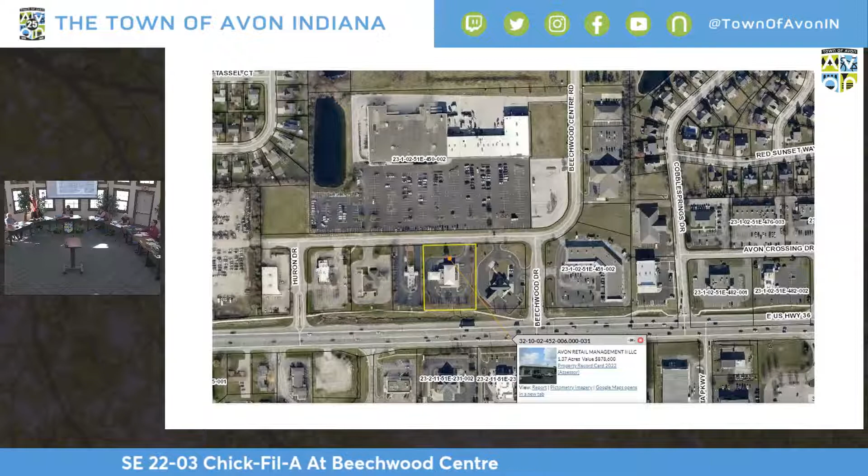And here's a location exhibit. You can see the site is highlighted in yellow.

Some history on the site: the subject property was part of the original incorporation of the town. The property is zoned C2 and it falls within Tier 1 of the US Highway 36 Overlay District. The lot was platted under MIP 03-04, Beechwood Center Lot 4C, alongside a development plan DPR 03-15, National City Bank. Since then, PNC Bank occupied the site. However, the lot is currently vacant.

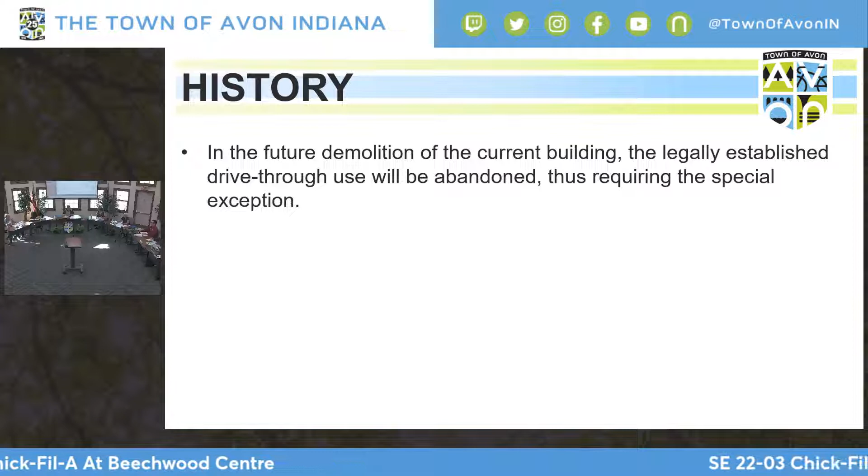In the future demolition of this building, the legally established drive-through use will be abandoned, thus requiring the special exception.

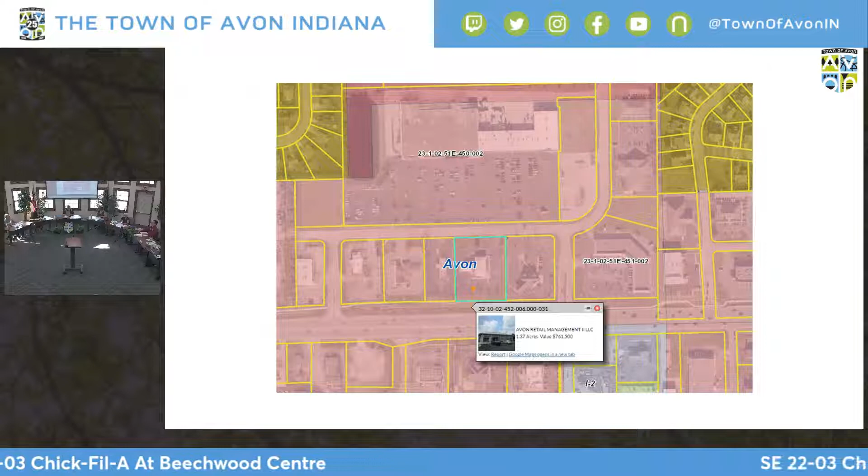Some comments per subsection 210E: drive-throughs are listed as a use that requires a special exception under Tier 1 of the U.S. Highway 36 Overlay District. The petitioner is proposing to construct a Chick-fil-A restaurant with a drive-through use, as is integral to Chick-fil-A's business model. Staff finds this proposal to be consistent with and conducive to the surrounding land uses, as the site currently has a drive-through, as do many of the neighboring Beechwood Center outlots. Staff finds that this proposal meets all criteria for a special exception.

With that, we recommend approval of this petition, subject to the following condition: approval is subject to the review and approval of a development plan review petition in accordance with Article 810 of the Town of Avon Unified Development Ordinance. I'm open for questions.

Questions for staff? If there are none, we're ready to hear from petitioner.

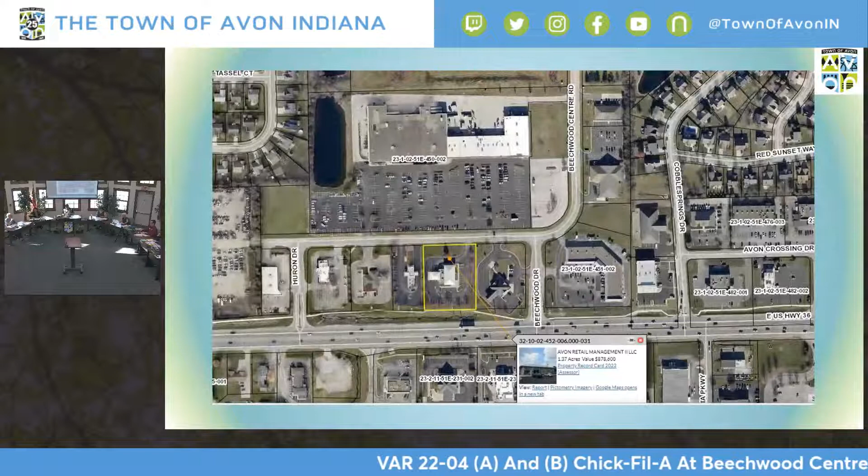Same location, same history. The applicable standards are subsection 210K. All components of a drive-through, including stacking space, menu boards, and pickup windows, must be located within the side or rear yards of a lot. Drive-through components cannot be located within the front yard, or in the case of a corner lot, cannot be located in the front yard that faces US Highway 36.

And subsection 612B3: each drive-through lane must have a bypass lane at least 12 feet wide. The bypass lane also serves as a drive aisle for parking. The minimum aisle width noted in table 6.1 must be provided. Bypass lanes do not need to be marked.

Staff believes that these standards were calculated for restaurants that have a much lower volume of drive-through users than is generally experienced at a Chick-fil-A restaurant at peak times. These variances would improve site navigability and stacking capacity, and allow for an efficient and convenient site layout by separating the site's drive-through and parking lot.

The strict application of the ordinance would constitute a practical difficulty in the design of this site. Having drive-through elements facing US Highway 36 is not atypical of the Beechwood Center area — both adjoining properties to the east and west have drive-through elements in their front yards facing US Highway 36. And the absence of a bypass lane will allow for increased stacking capacity, which would likely reduce spillover onto Beechwood Centre Road. Staff does not believe these variances would adversely affect the neighboring area.

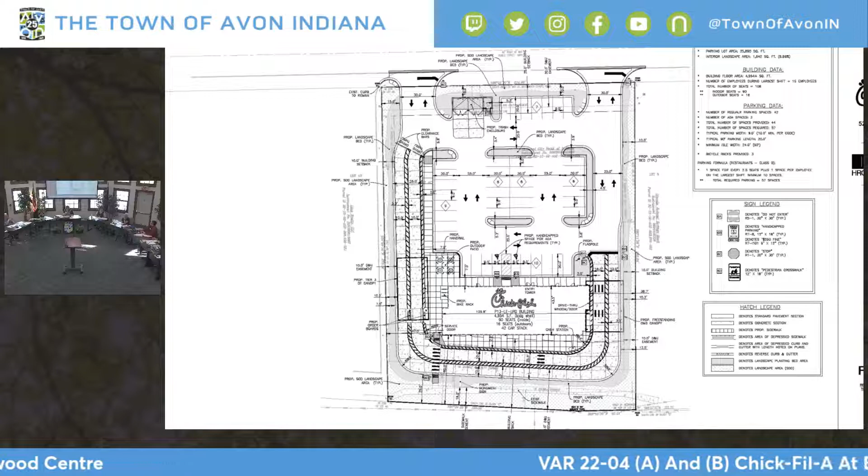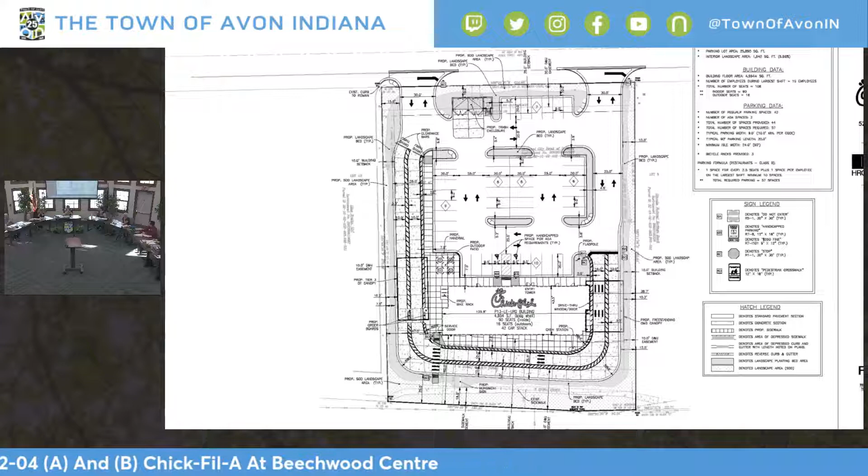But doesn't it also give people who are leaving the parking lot access to get around? I'm thinking of the McDonald's in front of Kroger, with 2 drive-through lanes. If you're parked right at the entrance to the drive-through lanes, you need that bypass lane to get out of the parking lot. But that wouldn't be necessary with this design, except it doesn't give people the option of leaving the drive-through lane if the fryer's down or something.

Specifically, what I was getting at is whether the function is simply for convenience, or is there a safety function here? That's why I'm asking. Yeah, I think safety is definitely part of the function of the bypass lane. But staff would say we're more concerned about the stacking going onto Beechwood Centre Road than about having this bypass lane from a safety standpoint.

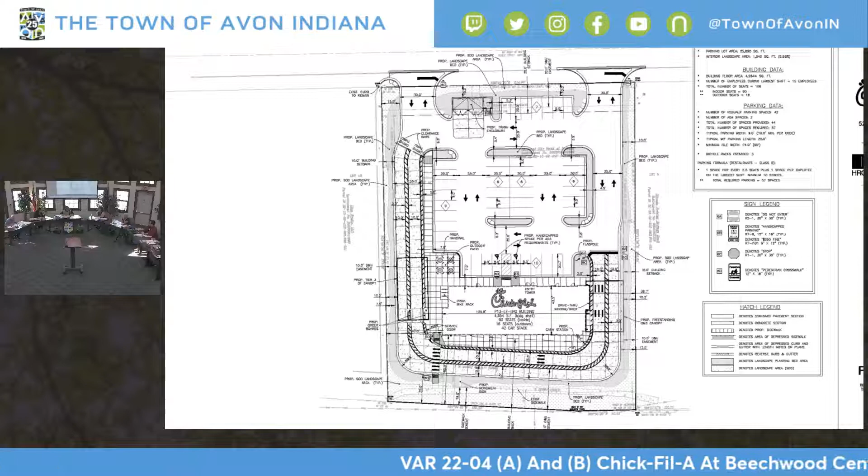And has this been through TAC? No, this has not been through TAC. We don't have any comments from public safety yet.

No, we do not. I do have a question though, because now that we're talking about not being able to exit the drive-through lane, I guess if there's an emergency, if there's a car stalled or something, do they just drive through the yard, get pulled out of the yard? How's that addressed? A bypass lane allows for that access.

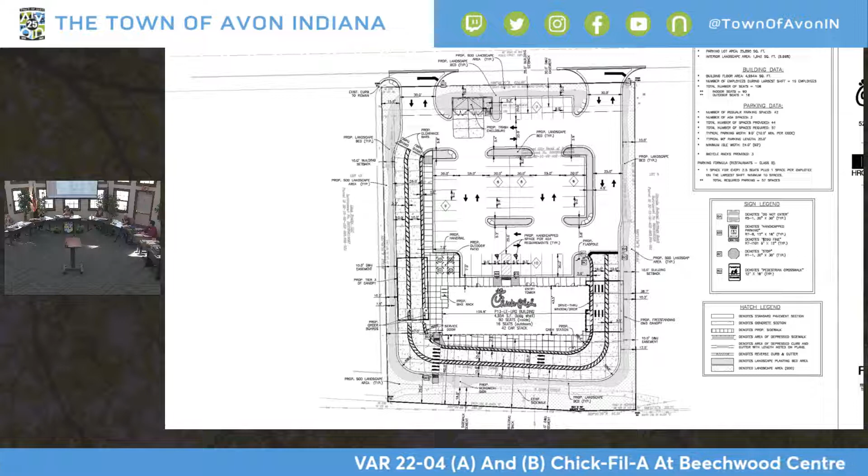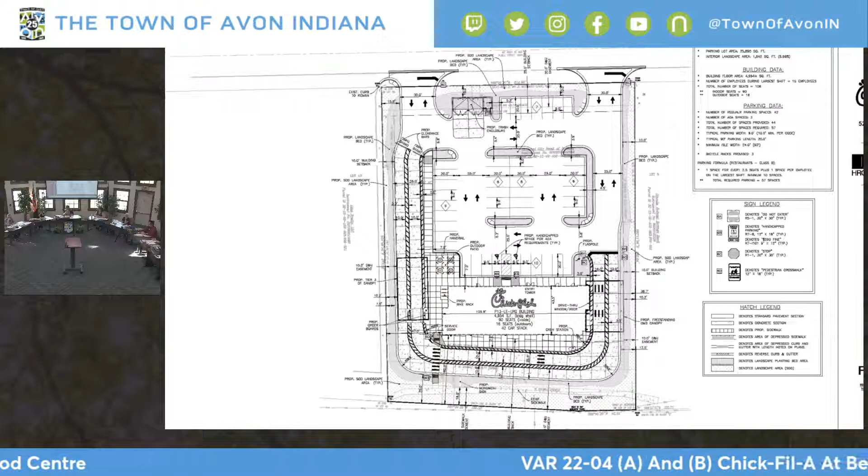We believe that with the condition of the signage, people will have adequate and ample opportunity to avoid the drive-through. We believe it's their choice to enter the drive-through.

Well, I'm talking about if you're already in the drive-through and your car breaks down, or a medical emergency happens. Because there's no bypass lane, there's no way to get that vehicle out. Are the two lanes separated by a divider, or are they just two lanes right next to each other? I believe they are separated, but that's probably a better question for the petitioner. I didn't review the site plan to those kinds of standards.

Any other questions for staff? If there's no more questions for staff, we'll hear from the petitioner.

Thank you. Well, let's pick up where the conversation with staff left off. If you'll all open your booklet to tab 2, we could even put it on the screen. I think the idea of this layout provides not only an efficiency enhancement, but also a safety enhancement.

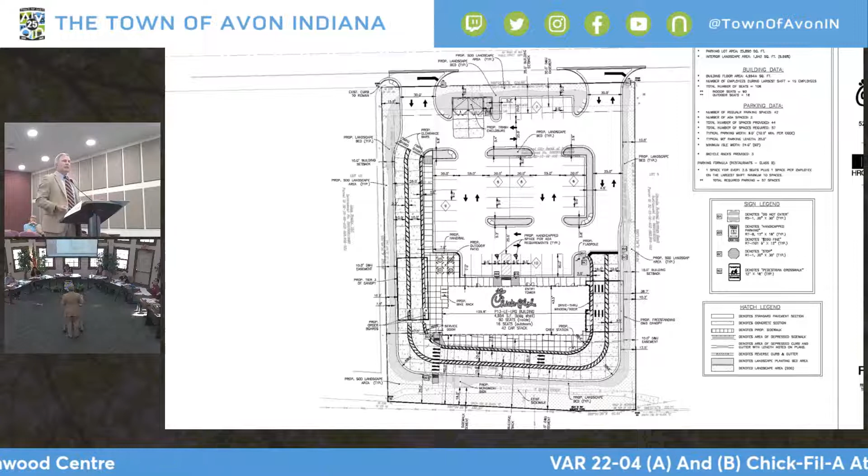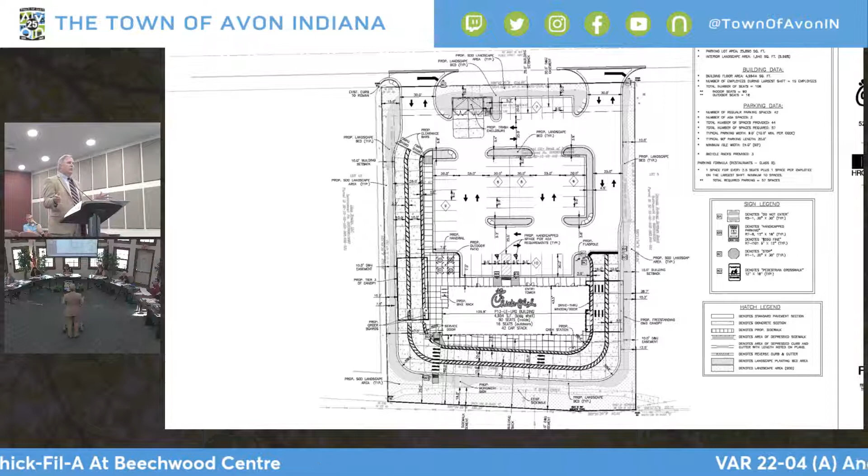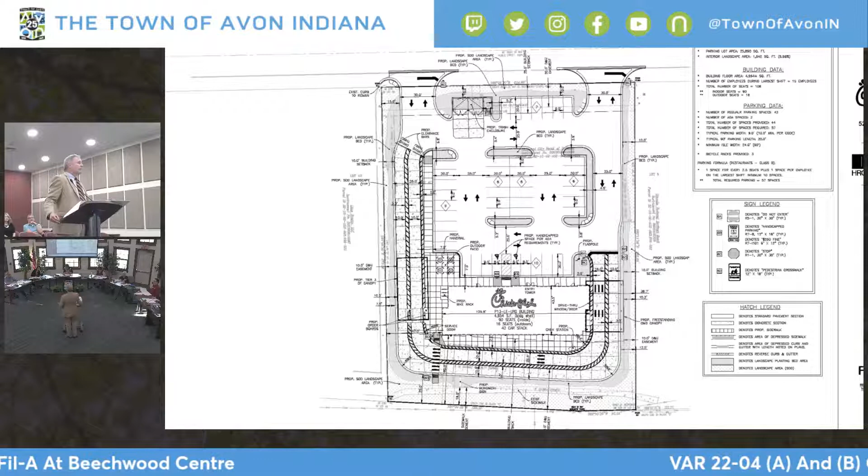Not so much for the off chance that a car breaks down while you're in it, but when you think about the normal drive-through situation, particularly under your UDO where you allow the bypass lane to be used as a drive aisle too—what this does is segregate and reduce conflicts between folks parking and walking into the building, out of the building, back to their cars, without crossing that drive-through traffic. So we think safety in 99.95% of cases will actually be enhanced through this.

By allowing that customer, when they come in, to view the landscape and either decide to queue in or park and walk in for that type of service, we think that makes much more sense than the traditional model of having parking on the outside of the drive-through lane, with the bypass lane serving as a drive aisle anyway.

We think that's going to reduce the amount of conflict for traffic coming in. As all of us have no doubt experienced, whether it's Chick-fil-A or Dairy Queen on a hot night, the worst thing in the world is to approach a business from a public street and want to turn in, and you've got stacking backed up to where nobody can get in and out. That's what this design is intended to mitigate, by having that additional stacking space in two lanes. People love Chick-fil-A that much, and there's a lot of family traffic with kids in the back who just want to get their stuff and go.

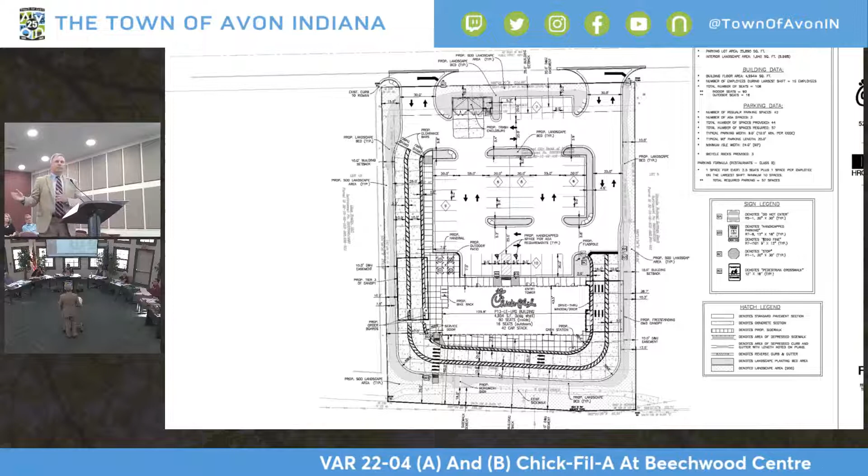That's a big part of the market. I know business reasons aren't always why we approve variances. We approve them because the code either doesn't contemplate something new—which is no fault of the code, that happens all the time—or your code, even though newly adopted, is essentially a carryover in these provisions on the 36 overlay from the previous version. So we submit that this layout is not only more efficient, but safer, not only for customers but for the team members and employees, by keeping that traffic separate. That's obviously a key finding.

When we look at variances of development standards, we look at the effect on the overall community, public health, safety, and welfare. We've got two concepts going on here: one, having stacking that fronts in a front yard. We've actually got two front yards, because Beechwood Centre Road is actually public. So we have two front yards, and we're kind of stuck either way.

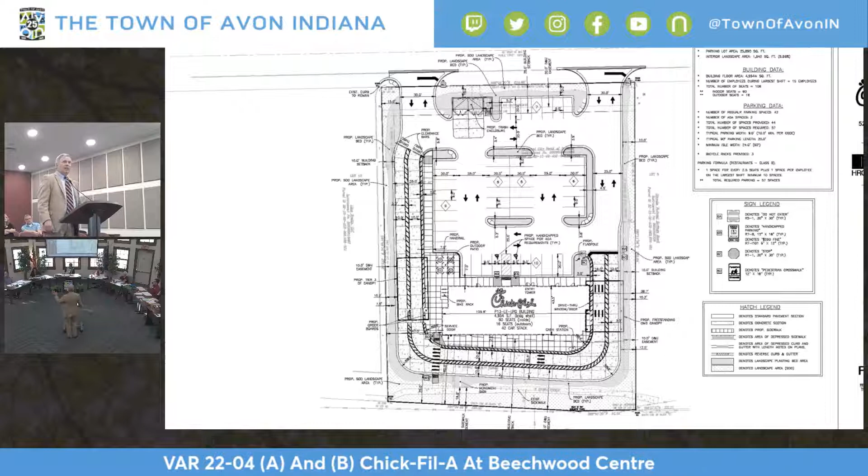Then we go on to whether or not this arrangement and the request for variances adversely affects our neighbors. We've got two true adjoiners, notwithstanding the parking lot for Rural King. We've got Dairy Queen to the west and the bank to the east, and they are similarly situated in terms of having drive-through and cars between 36 and their buildings. By reducing the opportunity for spillover, it helps those businesses—we don't want to block any drive aisles for our neighbors. For Rural King, it's all parking lot between then and there, so there shouldn't be any adverse impact to them as an adjoining property owner.

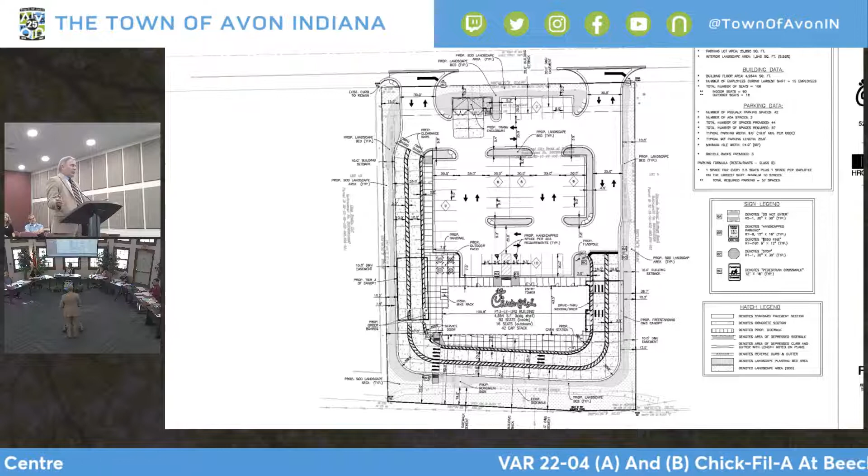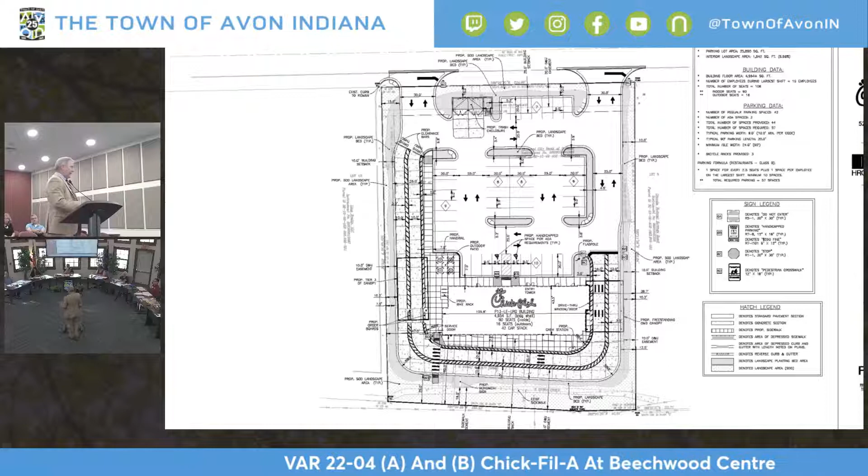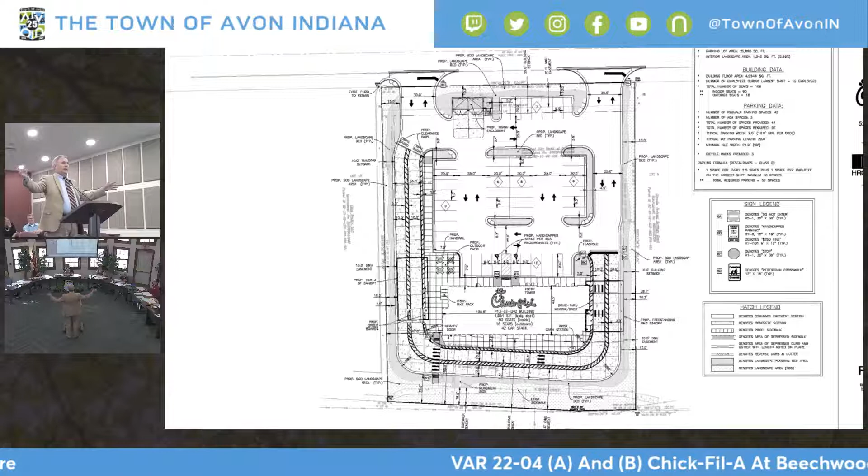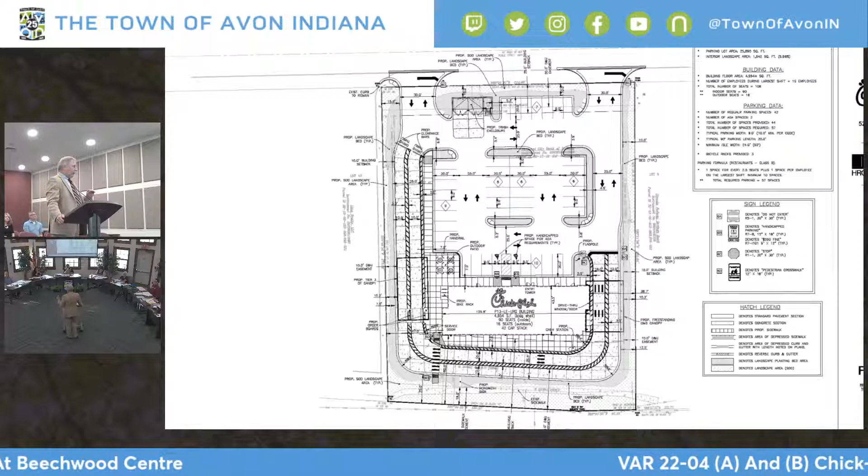We think that as we move into the other criteria—practical difficulties—one of those terms we all use in everyday language also has legal significance in zoning law. We believe that because this is a site that's already constrained, we're not just picking a site and developing it with whatever acreage we want—we have to work within the bounds. So we have to do something that works well within all the requirements of the 36 overlay. We think these variances are the minimum required to make the business economically viable, which is one of the allowed tests for practical difficulty.

We hope that makes some sense to you as a deciding body. We are not looking to do anything more than the best we can to serve customers in an efficient manner, to make that investment worthwhile, to keep the employees safe, and to keep the public safe as well.

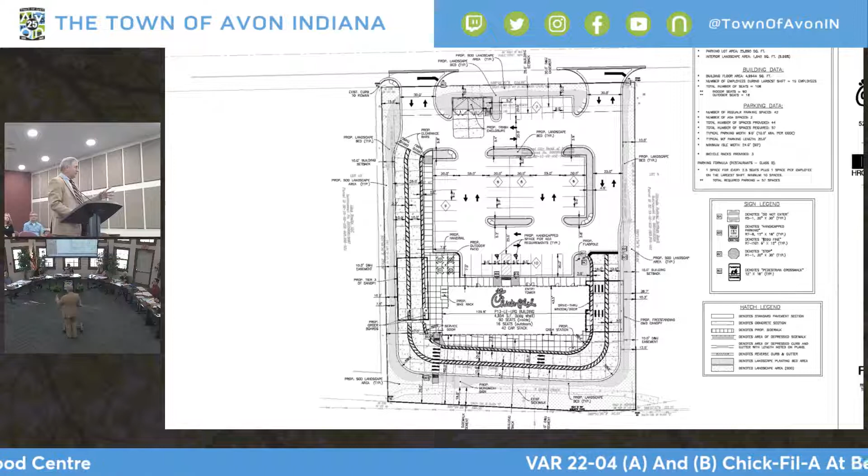And again, while it is true that business owners have choices to make as they improve property, we don't have a choice as to the physical constraints of this property with the 2 front yards and the shape and size. We are stuck with that. We have to work within that. So we think that's kind of the final criteria.

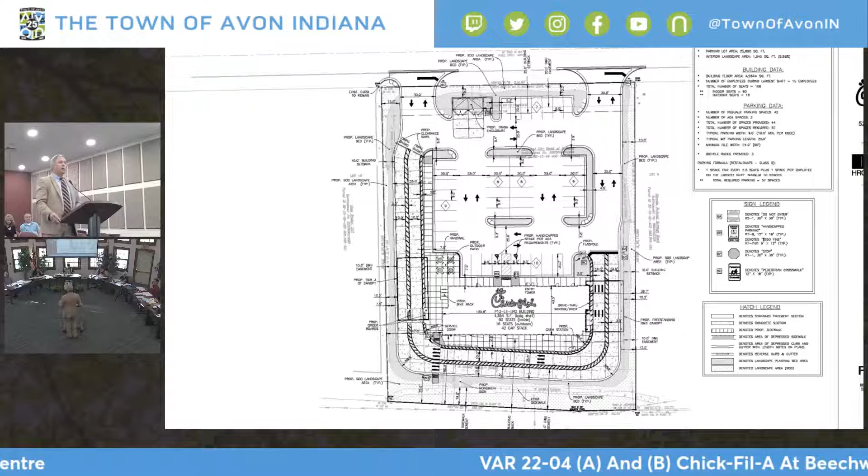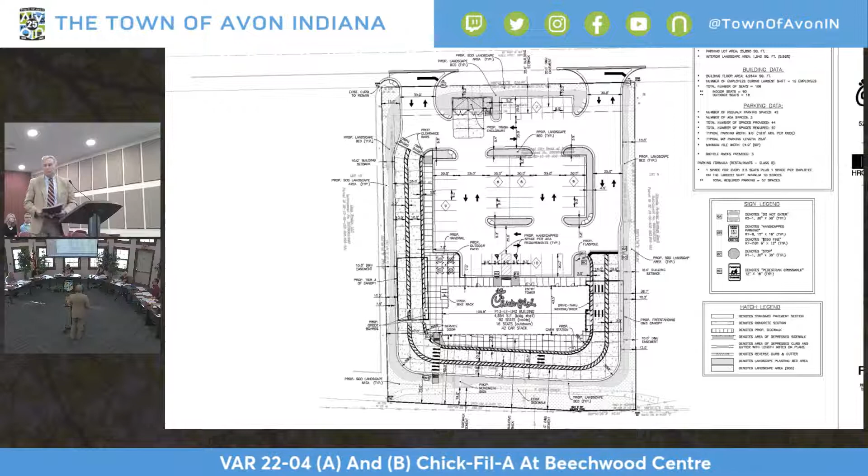Let's pause here. We'll open up the public hearing. Did anyone sign up to speak? And would anyone like to speak at the public hearing?

Hello, my name is Chris Tincher. I live at 1456 Northern Valley Trail here in Avon. And just want to say how excited we are. I'm the franchisee of the current location here in Avon, and our restaurant just celebrated 20 years here in Avon. And we're a tremendous supporter of our community. I love our customers. Our customers have really come to trust our service, and I'm really excited about this new opportunity that actually is going to alleviate some of the capacity current restraints we have at our restaurant, give our current employees a lot of additional opportunities, and obviously be able to serve more customers.

But I just thought I'd answer your question in regards to if a car becomes stalled. I will say that that actually currently happens even in our current location. Ultimately, we just kind of get in there and we actually help remove the car, so we'll just kind of push it out, take care and serve that customer, and get them to a place where the vehicle and the customer is safe.

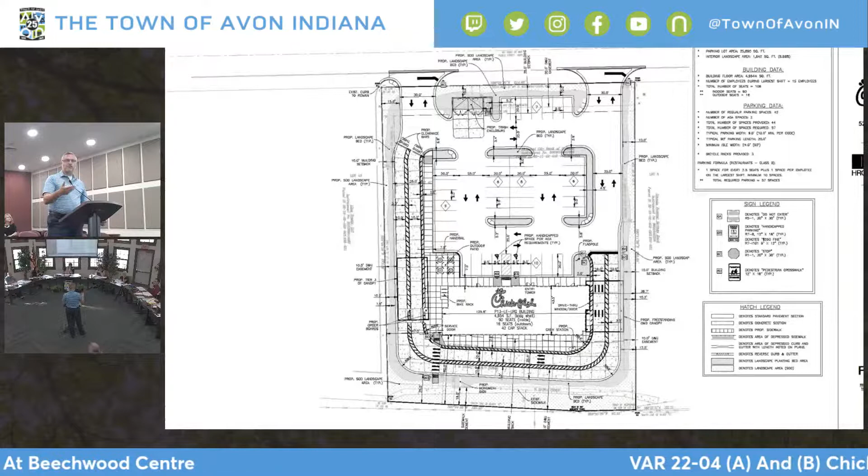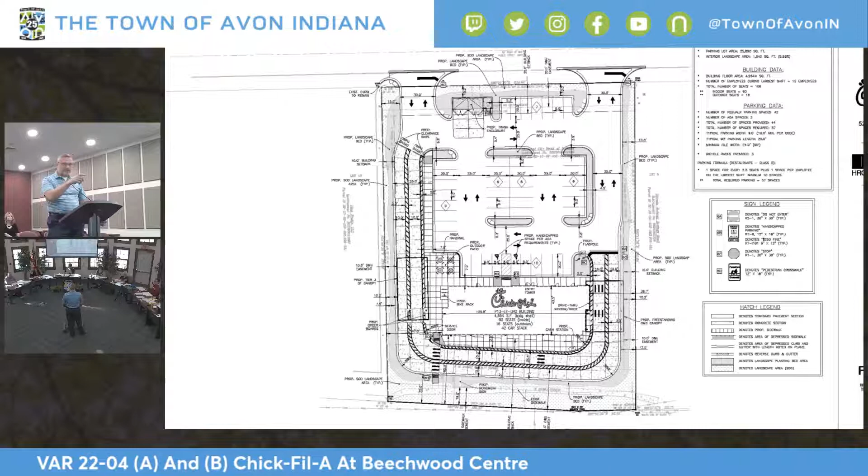Overall, with this design, it is a design that Chick-fil-A uses in their newer restaurants where it's possible in new communities. I will say that a dedicated drive-through for our team members' safety would be paramount for us to have - the opportunity where it's just dedicated cars only, just for our team members not having to walk through traffic. Obviously, for customers coming in, having the opportunity to make a decision whether they'll be able to see that clearly about getting into the drive-through lane or actually go ahead and park. So we believe that it will definitely be beneficial to our team, community, customers, and our guests. So, thank you.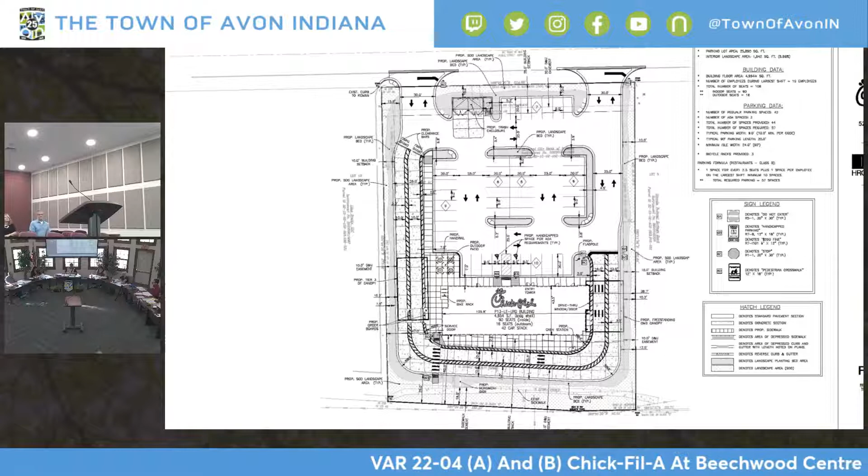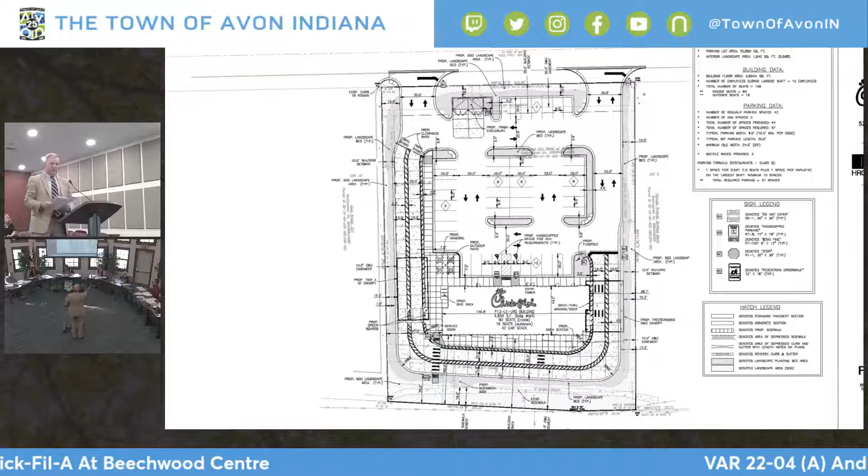Anyone else? I would like to ask a question just to follow up on my obsession here. So between the 2 lanes - I don't know who wants to answer this - if I'm looking at the perspective in tab 3, it looks like between the 2 lanes there's just a marked yellow space. It's just painted, not raised concrete, to separate the lanes if necessary - traffic could be diverted, you can move between the lanes. Okay, yes. That solves the problem entirely for me.

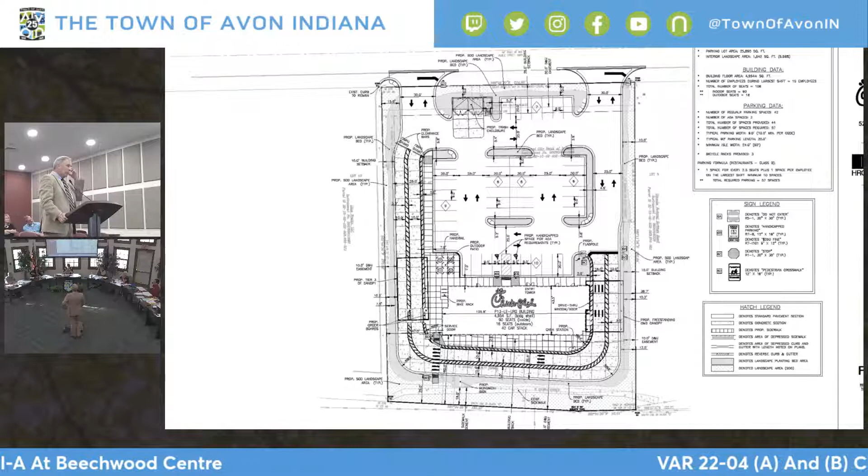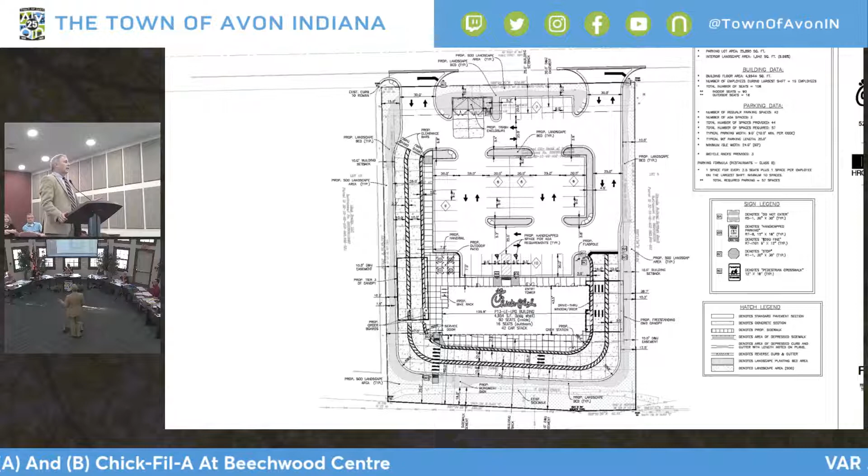It's just easier to do 660 on Beacon to get your list. We're so busy, I just didn't have time to pare it down, so we overnoticed. Zero calls - that's obviously why nobody's here, but we did. And we sent in our notice affidavit electronically, and Dan has the original. So we did notify quite a number of people. And no negative feedback? Nothing. Okay, thank you.

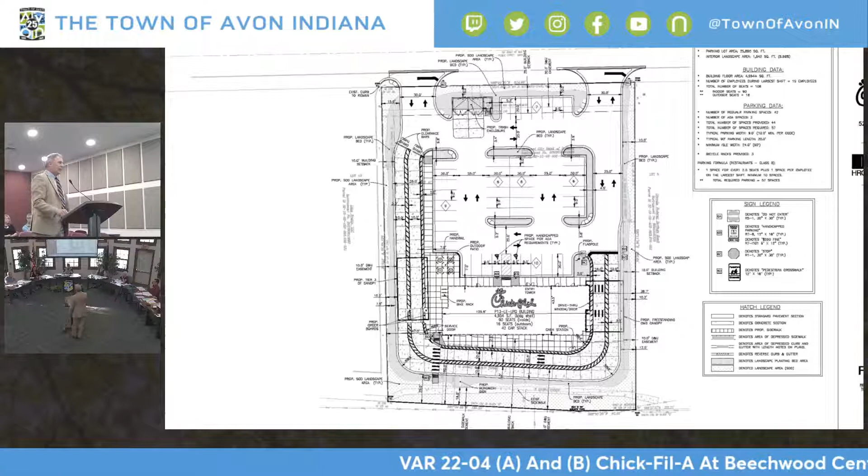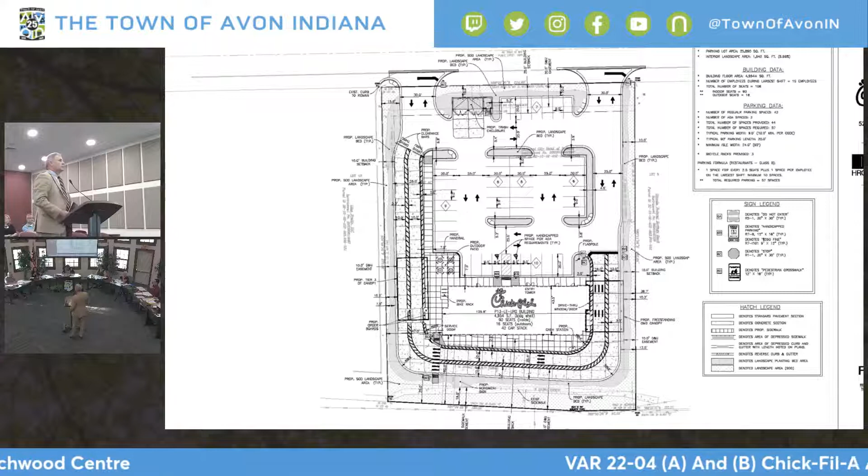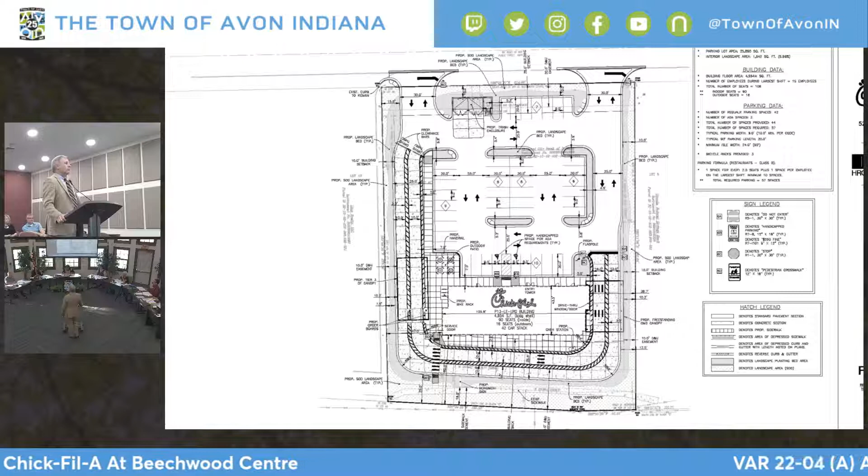So I'd also like to know what the hours of operation would be. And my follow-up with that - my thinking is I'm one that thinks about lighting and things like that. So kind of wondering what time to what time, and do your lights stay on all night, or how does that look? Can you paint that picture? I can't answer that question. Do you want to answer that, Chris?

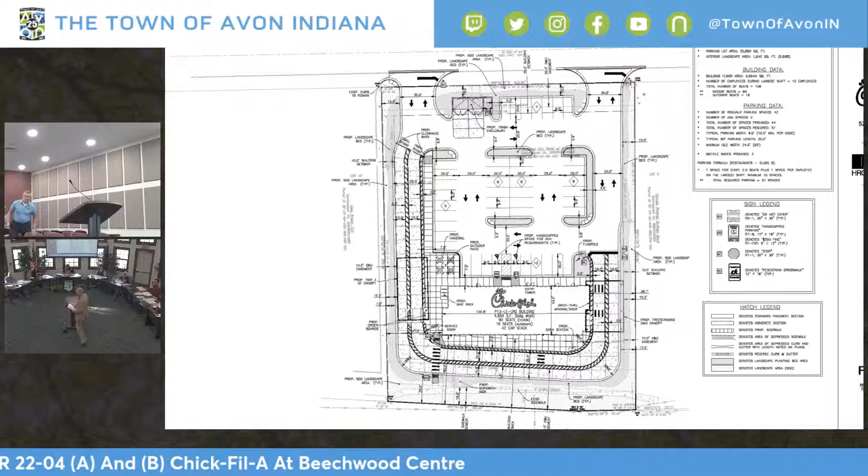Typical hours of the restaurant would probably be about 6 a.m. to 10 p.m. We do keep the lights on. They typically will be off when the restaurant closes, so about 11 o'clock when we are completely cleaned and closed down and have exited. Then the lights will go off, and we'll just have some gentle interior lights on the inside.

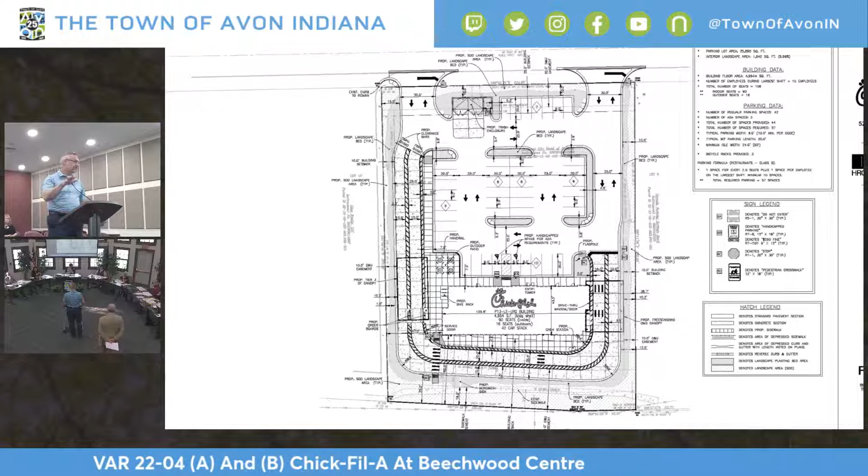So are they dimmers, or do they go down in a dimming kind of situation, or how does that work? Currently just the LED parking light bulbs, so those will be on and then they'll just be off completely at a certain point. So the building would be dark? That is correct. There is some soft interior lighting that we'll keep on, but other than that, there won't be a lot of that light noise.

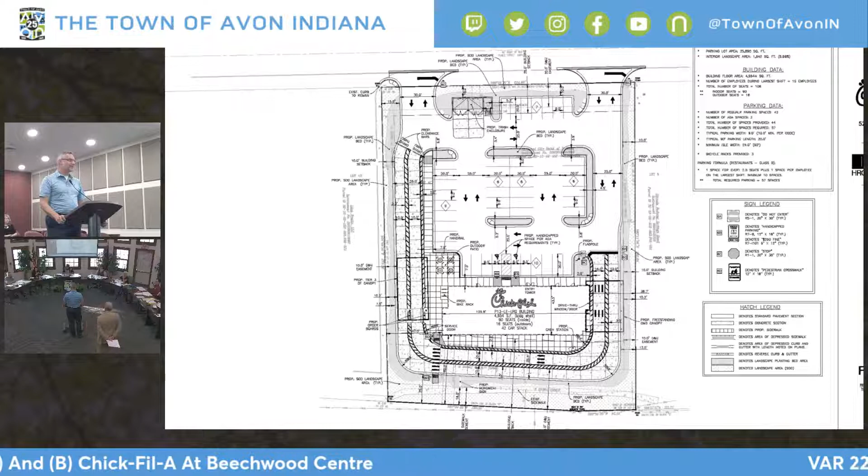Yeah. Okay, okay, all right. Thank you. Absolutely. And my last question is regarding landscape.

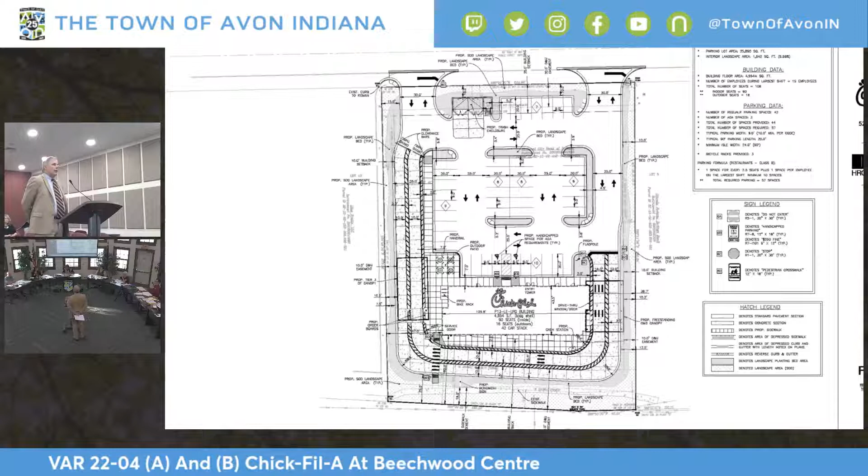I don't know if there is a landscape plan, or was there one done? Not yet. We did draw into the engineer plan kind of the ideas of where landscaping would go. You can kind of see those on the interior and exterior.

If you look at tab 2, it's kind of shaded a little bit. So there will be plenty of landscaping, and this is important from, I think, both the landscaping and lighting standards, which are valid questions. That is all borne out in the development plan approval process. We'll have to file very detailed, construction level plans, all of which is vetted through your staff, through the other agencies, and then ultimately approved by the Plan Commission. So we'll have to meet or beat the standards. We have not applied for any variances for landscaping. We just don't have a detailed landscaping plan to present to you tonight, just the areas that we've kind of identified on the exterior and interior for that.

So maybe not a question, but a comment. I like the design. I think it's innovative, and from a safety perspective, I think it's really good. Having experience crossing drive-through traffic, it would make me feel much safer. So as others have said, I think that's really good. I think the staff has done a good job answering the question about not having the bypass lane. And as I think about this too, I like how you were looking at keeping traffic off of Beechwood Drive there. But also, I think if you're going through the drive-through, you're pretty committed to going through the drive-through.